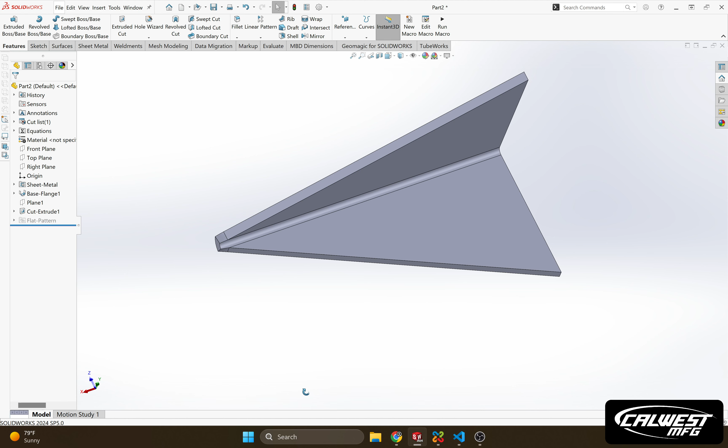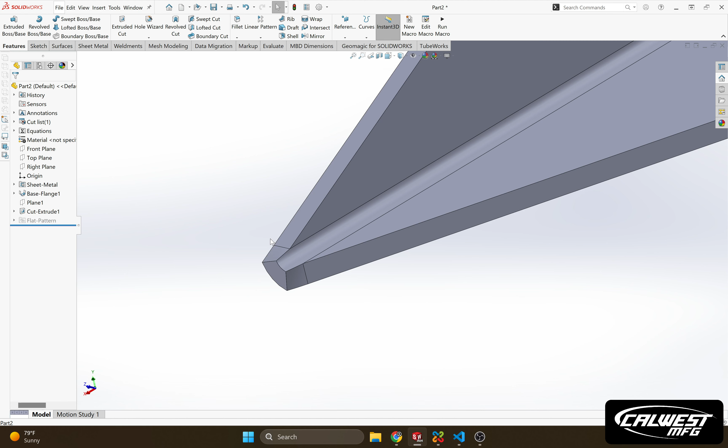Here we're going to cover some common issues with sheet metal that we see. This is an exaggerated version here of what's going on in our example. And so what happens is we have a die that needs to bend this part. And if you model something where it has like a point on it, it's going to fall off the bottom die, and you're going to get some like lobing here, or it'll kind of expand out, because what's happening is there's a V die underneath it.

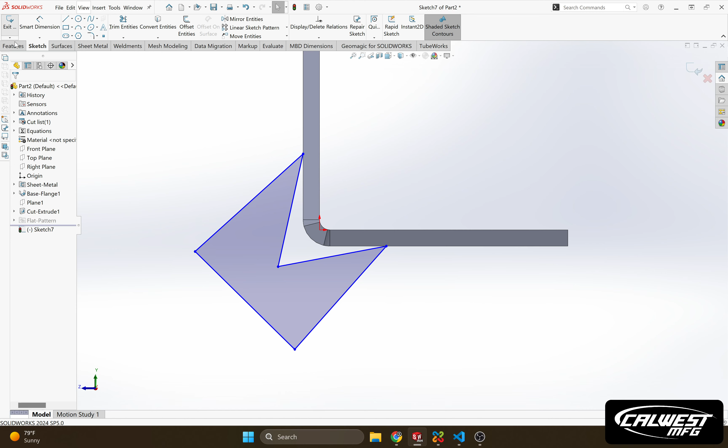So let me just kind of show you what that looks like so you can better understand what's happening. So there's a V die like this underneath it. Right, and then if we go ahead and extrude that out, it's just rough, just for conceptual reasons.

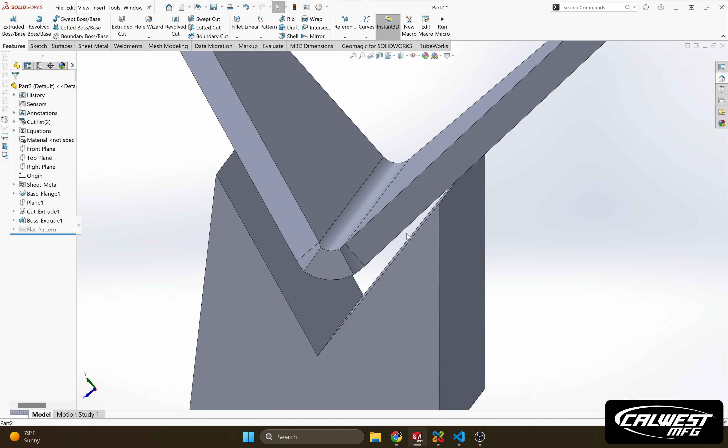Right, so let's say we're bending it, and this is the bottom die that we're pressing into, and my mouse is showing you where we're pressing it from the top of the press brake. This is going to fall off and start dragging on the surface, whatever that die's surface may be, and therefore you get some like bellowing out right here. So it is important to make sure that you keep enough room on both sides.

A good way to go about it, there's a couple common, or what I would consider off the shelf, dies that we use mostly, and I'll just list them out here. It's a 12 millimeter bottom die, 24 millimeter bottom die, and a 40 millimeter bottom die. From my research, this has been a pretty common setup for a lot of companies, and we have lots of other sizes, but this seems to be kind of the go-to.

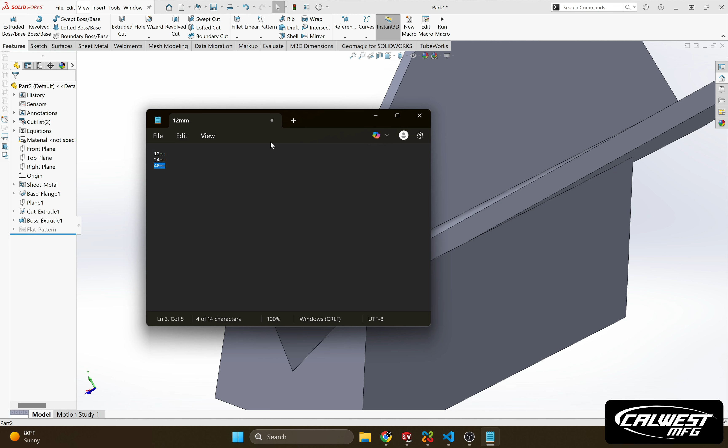12 is obviously for the smaller stuff, 1/8 inch down. This is for 3/16 up to quarter, and then from here we get up to like 3/8 to 1/2 inch. And these different sizes here are actually the distance between this point and this point. So if you go with a smaller die, let's say it's a 24 millimeter die, a 12 millimeter die will be down here, and therefore we won't have as much issue with this falling out in here.

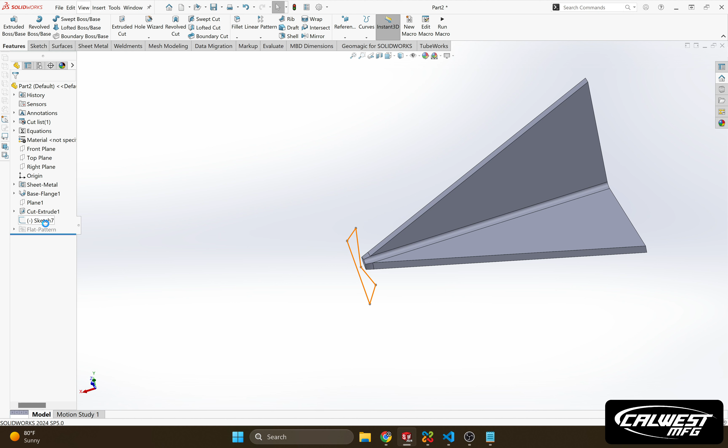Now, some things that would help fix this, if we still need to incorporate this into our design, is just change how that cut is. So let's say, for example, we give it some extra room, and now we're bending, and when we add that die back in there, now it's not falling off the edge of the die.

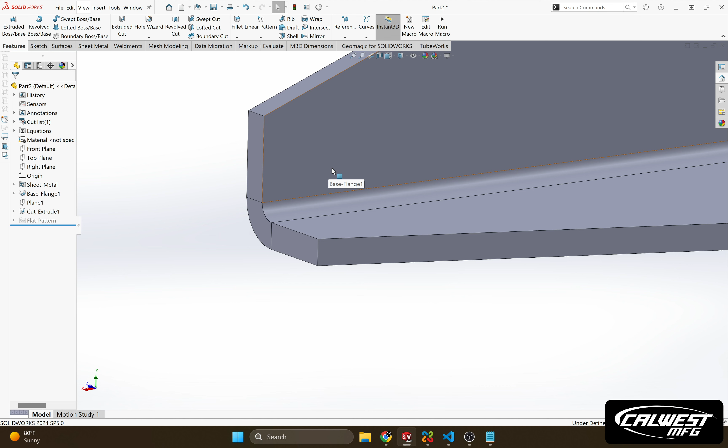So that's really important. I want to take a moment to say that because the majority of these parts are going to be air bent, it is important to make sure that you're using the correct inner bend radius. So this inner bend radius right now is modeled as a 0.0775. That is from our chart. Make sure that you have that down.

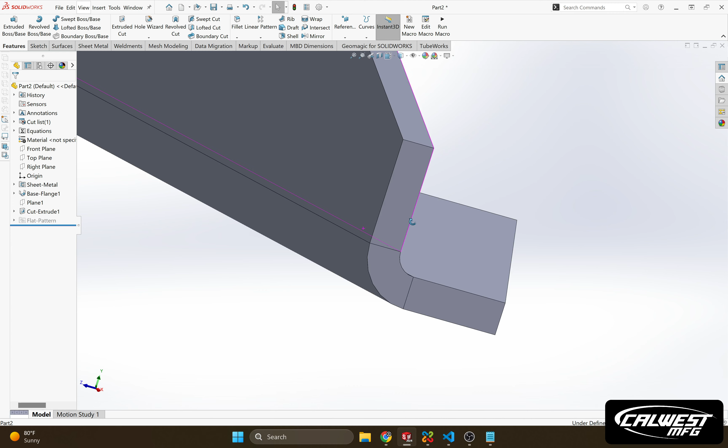The K factor is going to be 0.4, but it's less of a concern because that's something we're going to adjust on our end, as we do accept solid files or CAD files in order to quote stuff as well. So you don't necessarily have to send us the DXF where it's all locked into place.

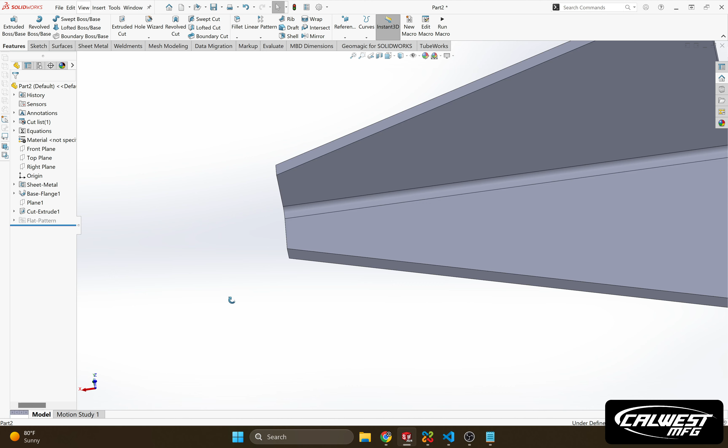So that kind of covers my main concern with press brake bending. There's a lot of different scenarios you can end up in, like you can't bend inside of a box, but just keep in mind that this is definitely the #1 issue that we run into.